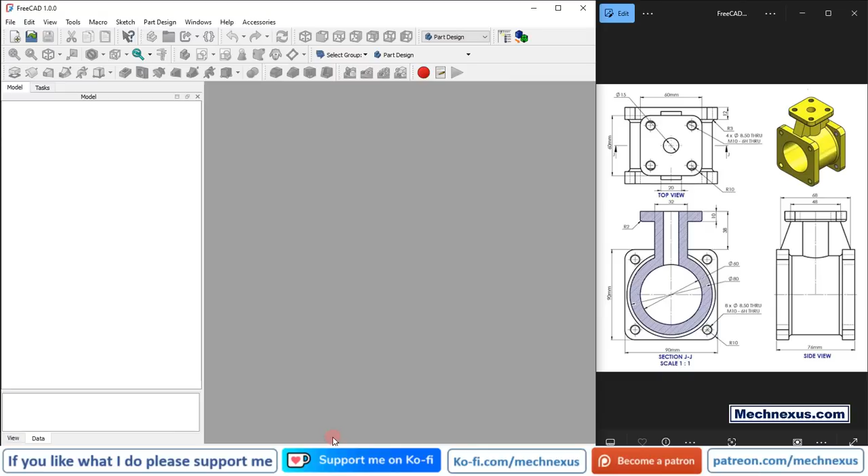So here I have created a new file, and for this tutorial I am using FreeCAD version 1.0. So you must have FreeCAD version 1.0 at least, or a higher version.

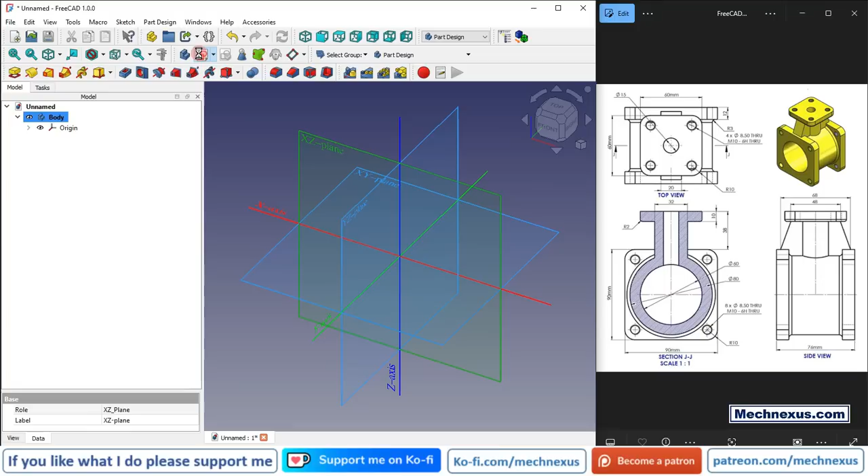Now I will insert my body, and turn on my origin plane. Now we will create our first feature on the front plane. We will select the front plane and click on sketch, and I will turn off this origin plane.

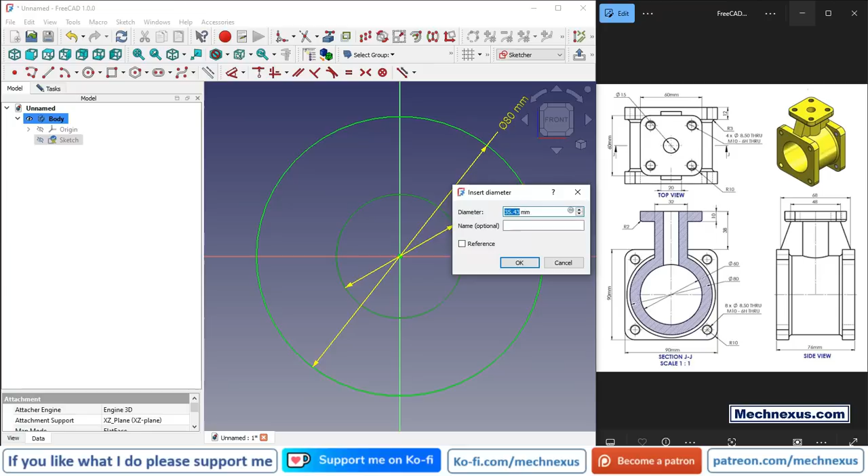Now we will draw this internal and external diameter. So click on the circle and create 2 circles. Click on smart dimension, and the outer diameter is 80 and inner diameter is 60.

Now we will come out of the sketch, and now we will extrude it to a distance of 52. So select the sketch, click on pad, and here tick the symmetric to plane option and give the distance 52 and say OK.

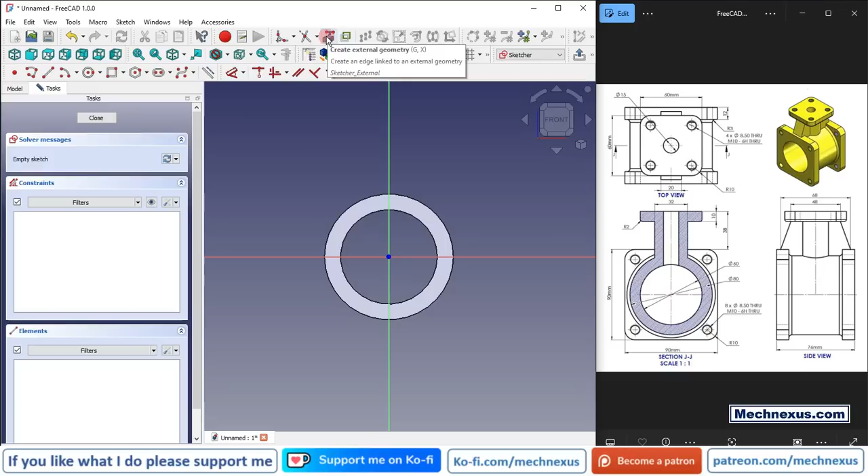Now we will create this pad. So for this we will select this face and click on sketch, and here we will project this internal diameter. Click on project geometry and project this diameter, and now create a circle and press Ctrl key, select both, and here you will see the option of equal constraint.

And now click on the rectangle, create a rectangle, and now here we will make it symmetric. So click on symmetricity, select this point and the origin point, press Ctrl key, select this point and the origin point. So now we will give the dimensions.

So select smart dimension, and it is 90 mm. Now we will press the Ctrl key and select this vertical and horizontal line and make it equal. So now our sketch is fully constrained.

Now we will extrude it to a distance of 12 mm, which you can see here. So here I will select the sketch, click on pad, and here I will give it 12 mm and say OK.

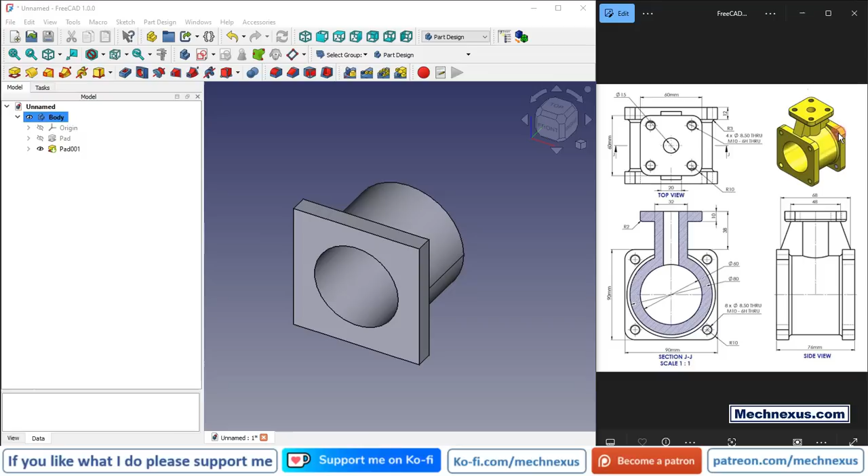Now our next feature is to mirror this pad on the other side. So we will select pad 001 and click on mirror, and we have the mid plane here. So we will go and select reference, and select this mid plane. You can see that it has been successfully mirrored on the other side. Say OK. Now we will move to the next feature.

So our next feature is to create a datum plane. To create a datum plane, we will place our model in the isometric view, and we wanted to create this top feature.

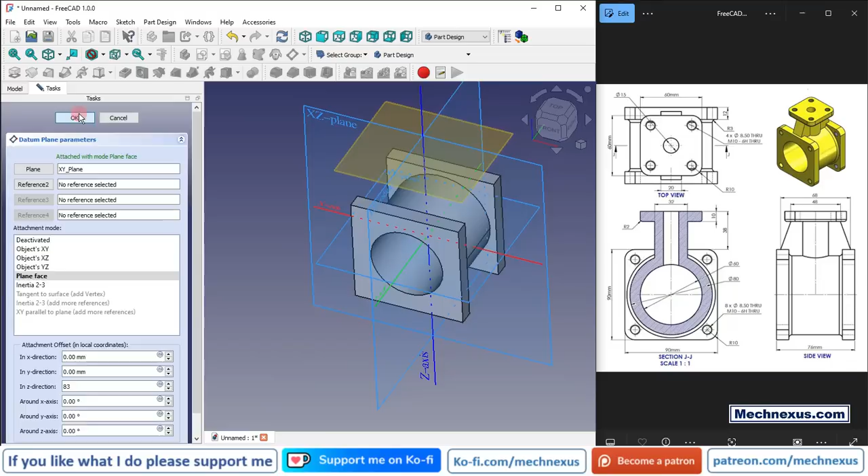So here we will turn on our origin plane, and here we will select this XY plane, and here we will click on the create datum plane option, and here in the Z direction give the dimension 83. You can calculate this dimension from the drawing, I have already calculated it. So you can see that a datum plane has been created.

Now I will turn off the origin plane, and I will refresh my model. Now we will create our next feature on this datum plane, which will be this circular feature.

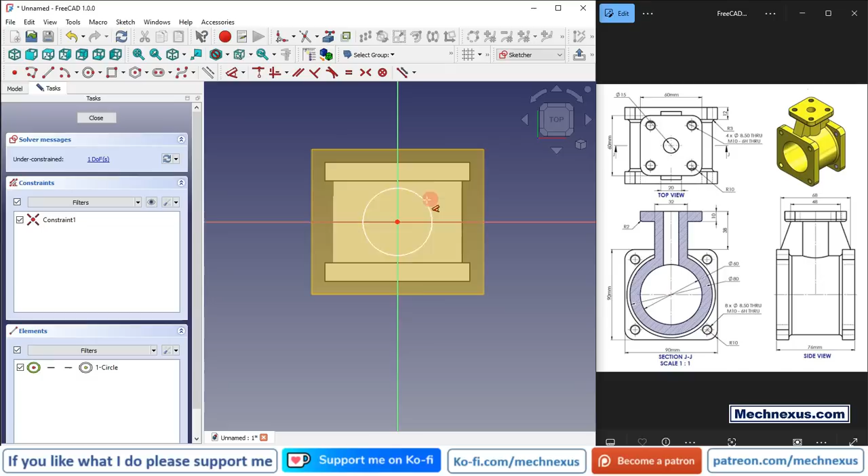So select the datum plane and click on sketch, and here I will click on circle and give the dimension of 32. Click close and press the space bar and hide this datum plane. Now select the sketch and click on pad and click on up to face. So you can see that the feature has been created. Now say OK. Now we have the solid face.

Now we will create this square pad. So select the face and click on sketch, and now click on the 2-point rectangle and create a rectangle, and now click on symmetricity. Select this point and the origin point, and here we can see the dimension is 60 mm. So select smart dimension and give it 60.

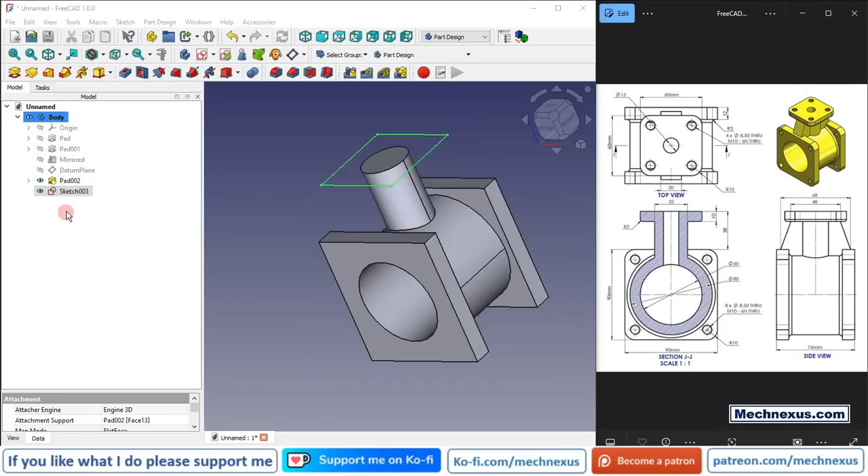Now press the Ctrl key, select this horizontal and vertical line and make them equal. Now come out of the sketch, and we will create a pad of 10 mm. So select the sketch, click on pad, and here we will reverse it and say OK.

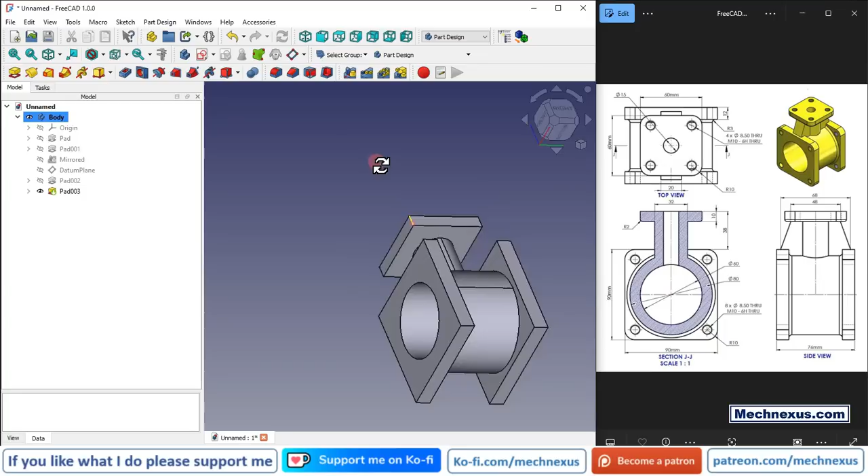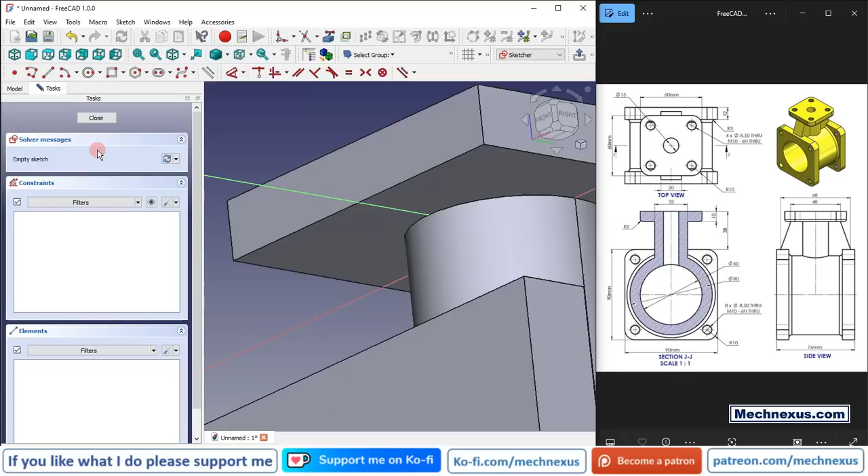Now our next feature is to create this rib. So we will select this bottom face and click on the sketch, and we will switch to the isometric view, rotate our model, and switch to flat lines. And now here we will project this diameter. To do that, click on project geometry and project this diameter, and now let's move to the bottom view, and here for better sketching we will switch to the wireframe.

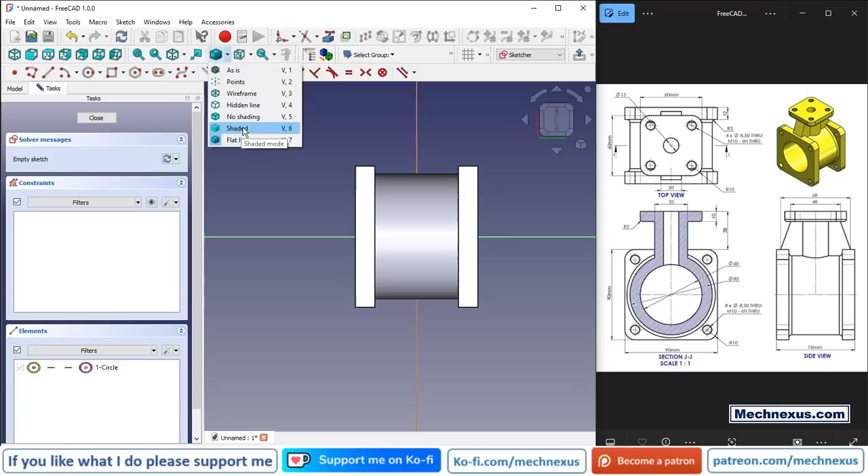So that I can see. Now here I will select a 3-point arc and create one arc, and I will rotate it, and I will select this and this and make it equal, and I will select the center and make it coincident. Now we will select the line tool and close our profile.

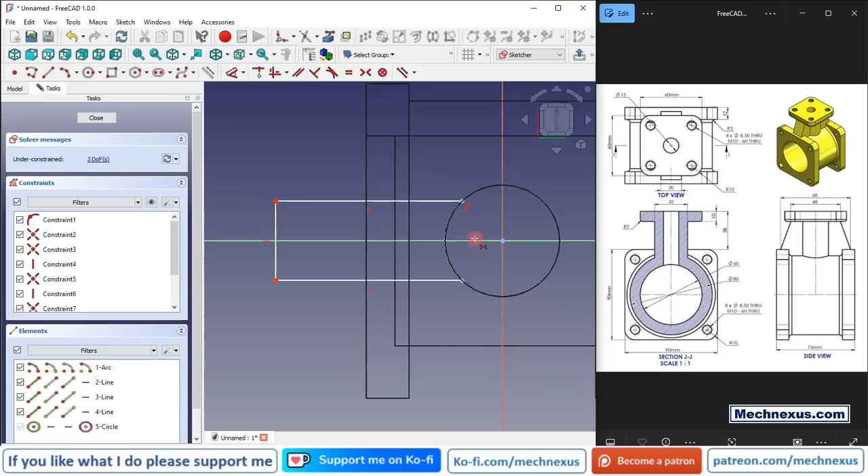Now we will give the dimensions. So we will keep this line outside of the body, but we will make it symmetric. Click on symmetricity, select this point and this axis, and give the dimension 20, and from this line to this origin point give it an approximate dimension of 60 mm.

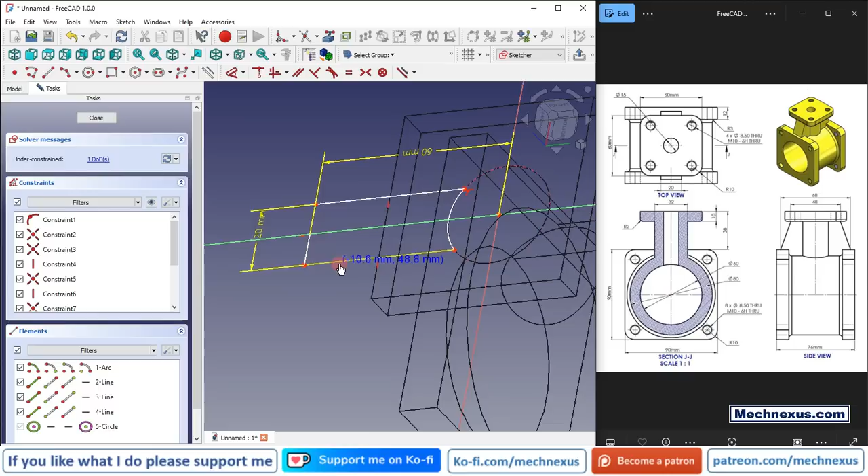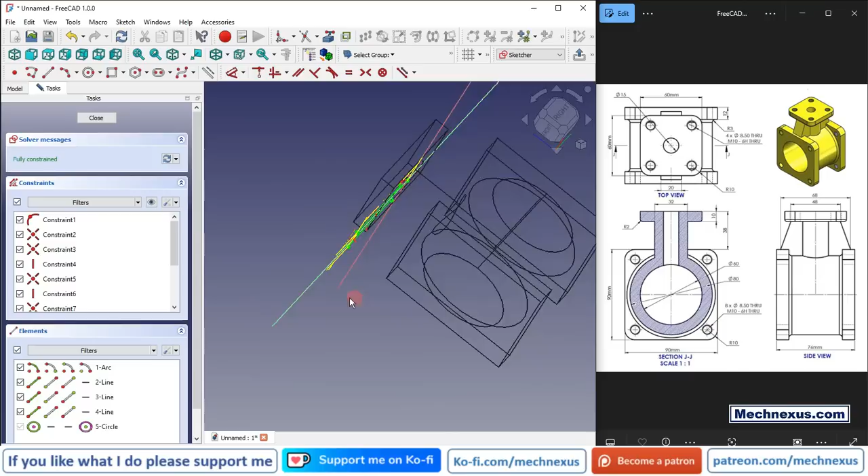Now let's see what is unconstrained. So here symmetricities got removed, so we will again click on symmetricity. Rather than this arc, we will select this point and this axis. So now you can see that our sketch is fully constrained, and now we will come out of the sketch and switch to the flat lines view.

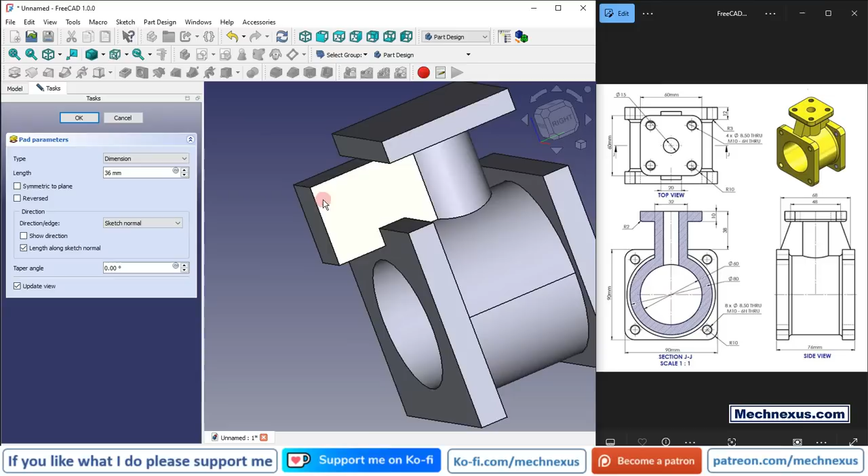And now we will extrude it. So select it and click on extrude. Let's give the approximate dimension of 36 mm. Now we will remove the extra geometry in the next step.

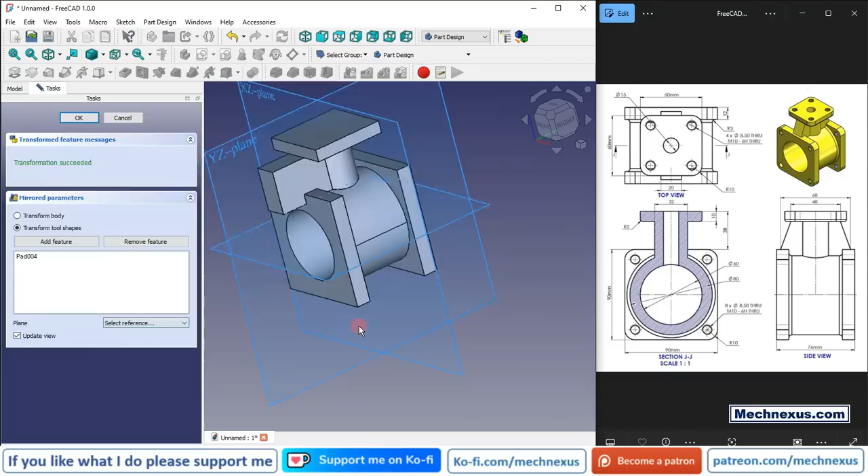So first thing we will do is mirror it on the other side, because we can see the same rib on the other side. So select the pad, click on mirror, and from here click on select reference and select this plane and click OK.

Now we will remove the material. The dimension is given here. So if you see, this is the 48.

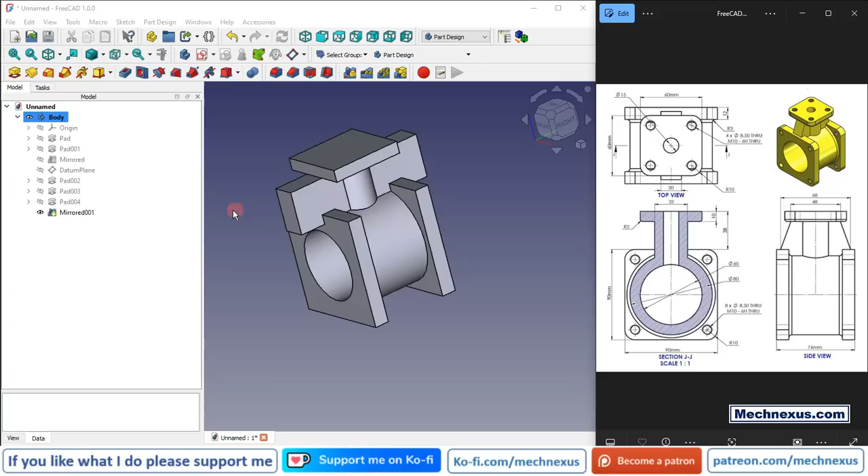So for that we will go on our origin plane and create our sketch on this YZ plane and click on the sketch, and now from here we will switch to the wireframe, go to the model tab and turn off the origin plane, and now we will click on project geometry. We will project it.

And now select the line tool, and here we can see that this edge is also required to be projected. So I will project it, and now I will select a line tool and click on project geometry again.

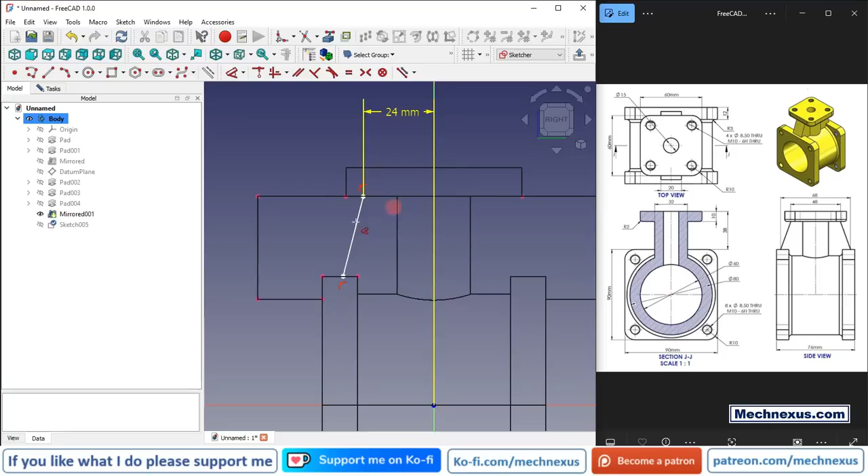It is already projected here, so I will select this point and this line and add a coincidence. So this is the 48, so from center this will be 24. I will select smart dimensions, and from here to here it will be 24, and this point is of a 34. So give it a 34.

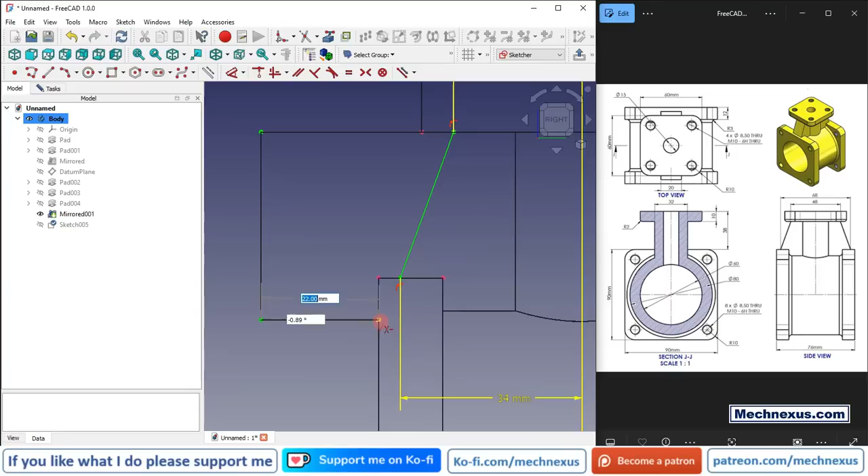Now we will close our profile and completely remove the material. So select the line tool, select this and join it, select this and join this, select this and join. Okay, so we have the closed profile.

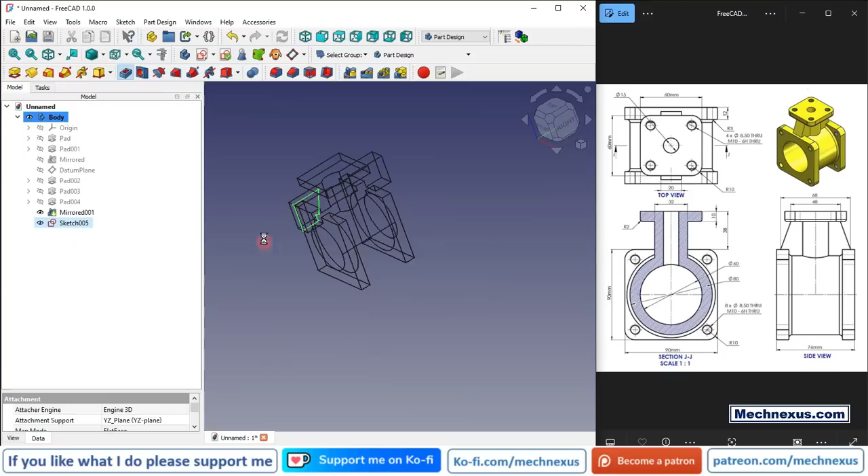Now we will come out of the sketch, and from here we will switch to the flat lines, select the sketch, click on cut, and from here we will say it through all and symmetric to the plane. So the material is removed.

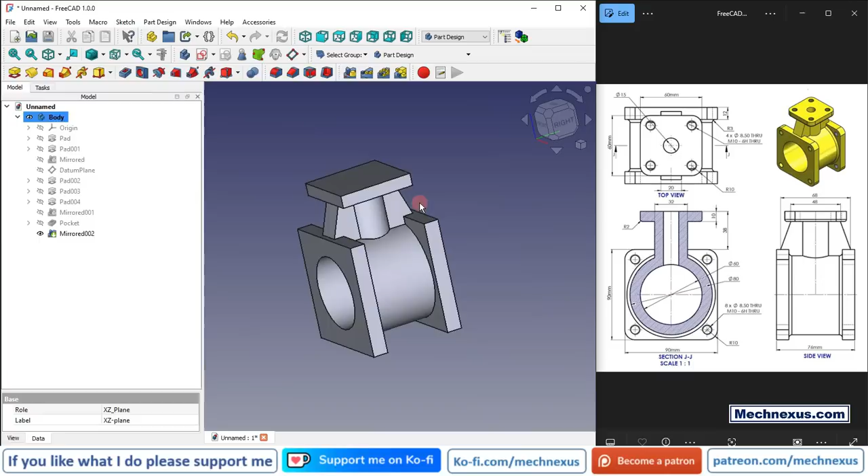Now we will mirror this pocket on the other side. So click on mirror, and from here click on select reference and select the XZ plane and say OK. And now here I have not saved my model, so I will save it.

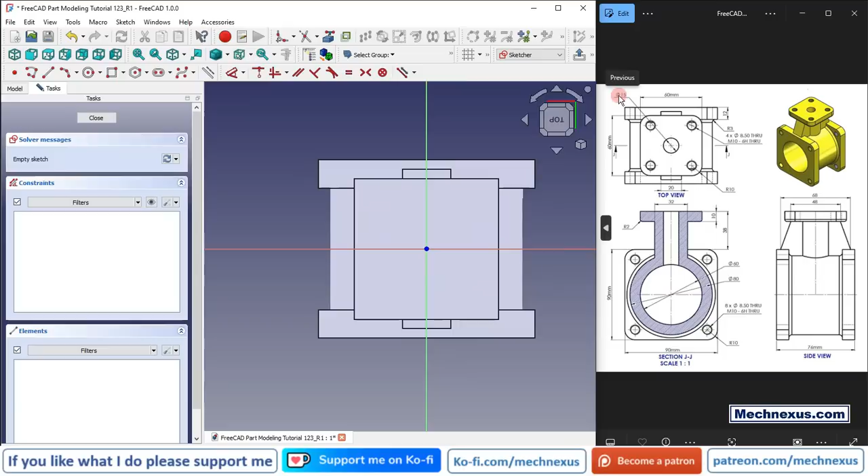Now let's move to the next feature, which is to create this hole. So I will select this top face and click on the sketch, and this is the hole of 15 mm, which we can see here. So click on circle and create a circle, select smart dimension, give it 15 mm, say OK.

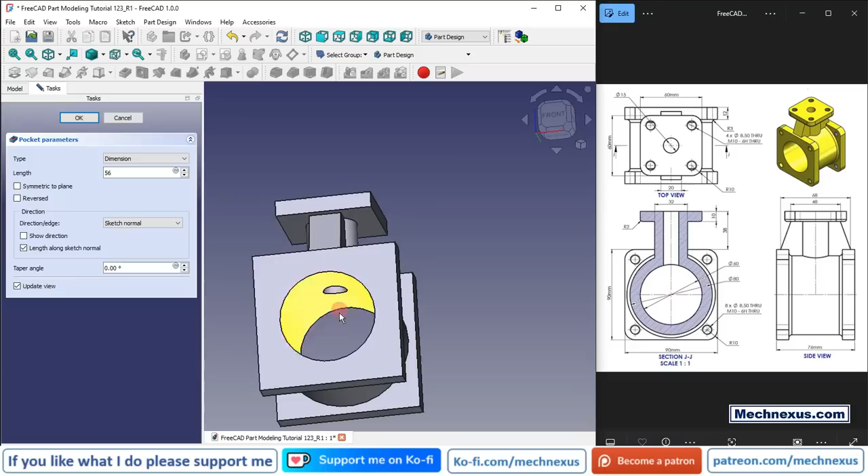And now select the sketch and click on cut. You can also use the hole feature, and now here I will give the approximate distance of 56 mm so that it opens in a clear area here. Say OK.

Now we will create these 4 holes. To do that we will select the face and create the sketch. If you see in the model here in isometric view, this hole is the size of M10. So for that I will select this face and click on sketch, and here I will select a rectangle and create a rectangle.

I will select all the sketch and make it construction, and at the same time I will select this symmetricity, select this point and this axis, and select smart dimensions, and this is the 70, and I will select this horizontal and vertical and make it equal.

Now here I wanted to create an M10 hole, so here I will create 4 circles and select smart dimension, give this 10 mm. Now press Ctrl key and select all the circles and give it equal.

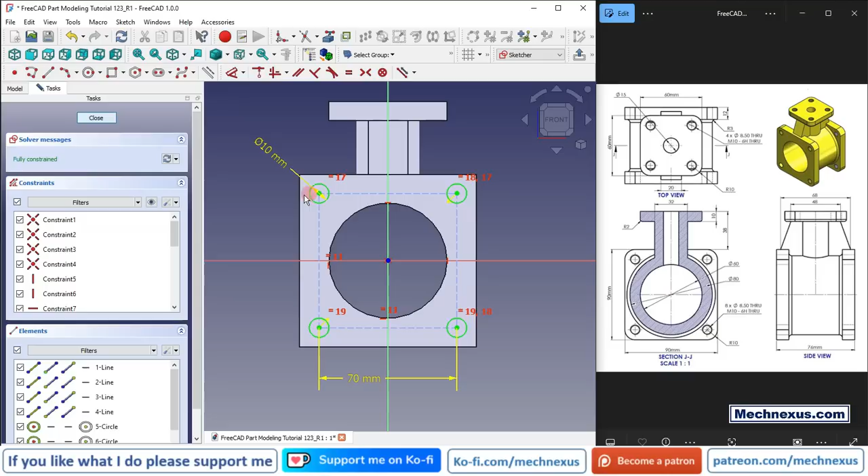Now we will use the hole wizard tool, so select the sketch, click on the hole feature, and from here select ISO metric regular profile, and from here select the size of M10, and I want this M10 hole on this plate as well, so I will make it through all and say OK.

Now in the next step we will create the hole on this top face, which is also the M10 size. So we will select the face and click on sketch, and here we will do the same thing which we did in our previous steps. So we will create a rectangle.

Press the left mouse button and drag it, and everything is selected, make it construction. Now click on the symmetricity, select this and origin point, and now center to center distance is 40.

Some of the dimensions are missing in this drawing, so I have assumed some of the dimensions. So for the dimensions which are missing on the drawing, follow the video.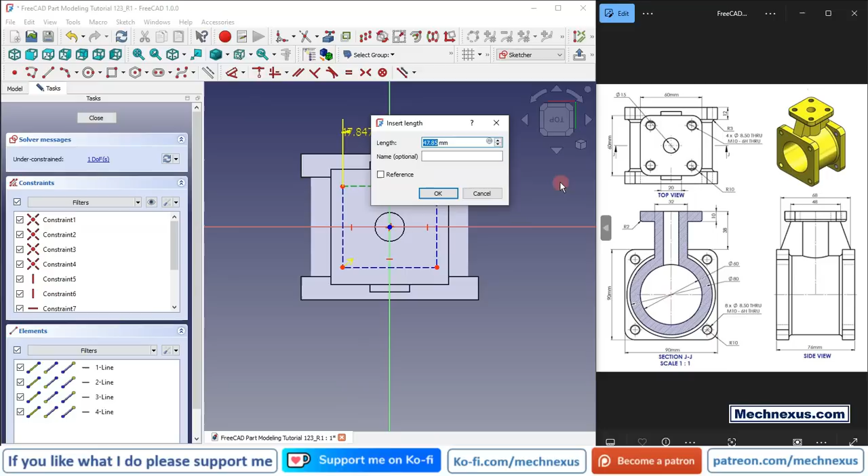So here I will give the 40 mm, and now I will select this and make it equal. Now I will close it.

Here I will again edit the sketch, and I have not given the hole diameter. So as we did in the previous steps, we will create 4 circles, constrain one of the circles and make all 4 equal.

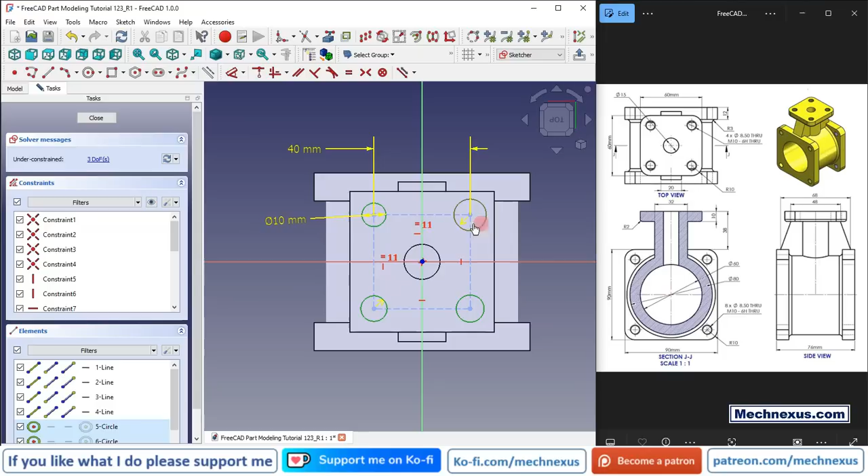So here I will make this 10 mm and press the control key and select all 4 and make it equal. Click on close and click on the hole wizard, and from here ISO metric regular profile and set it to M10, and here I have given the dimension.

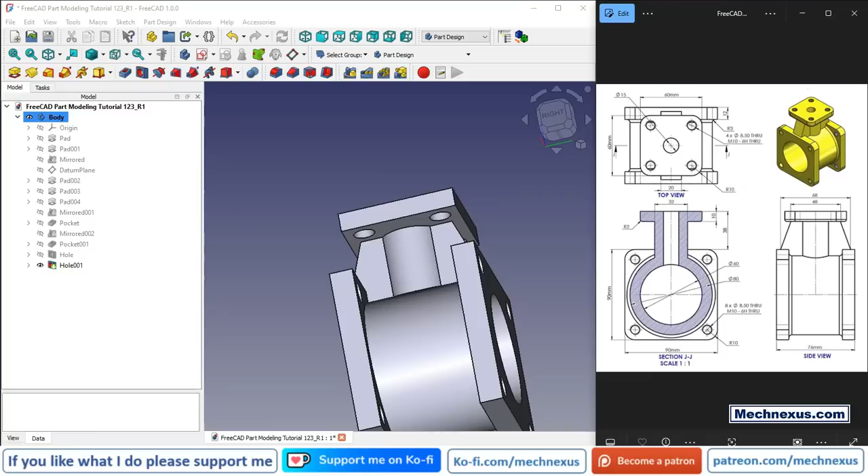25, but my plate thickness is 10 mm, so here I will give it 10 mm. Say OK. Now press 0 for isometric view.

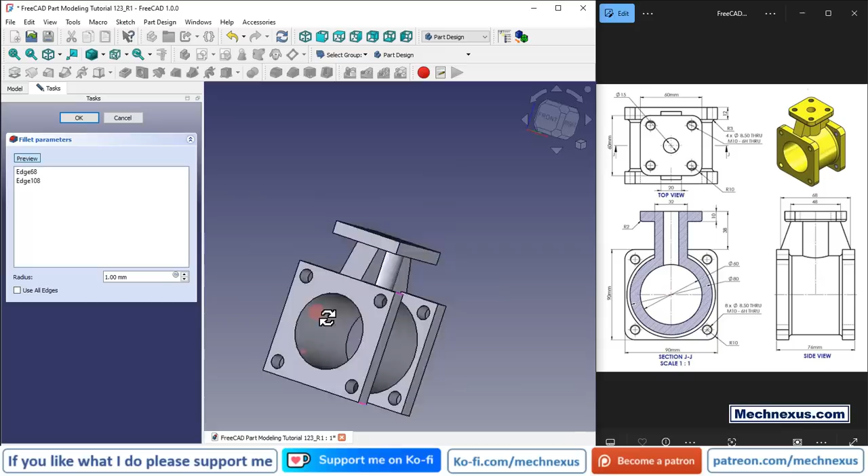Now we will create a fillet. So here is the fillet of 10 mm which we can see here. So we will click on the fillet, and now we will select all the edges which we want to give the fillet of R10.

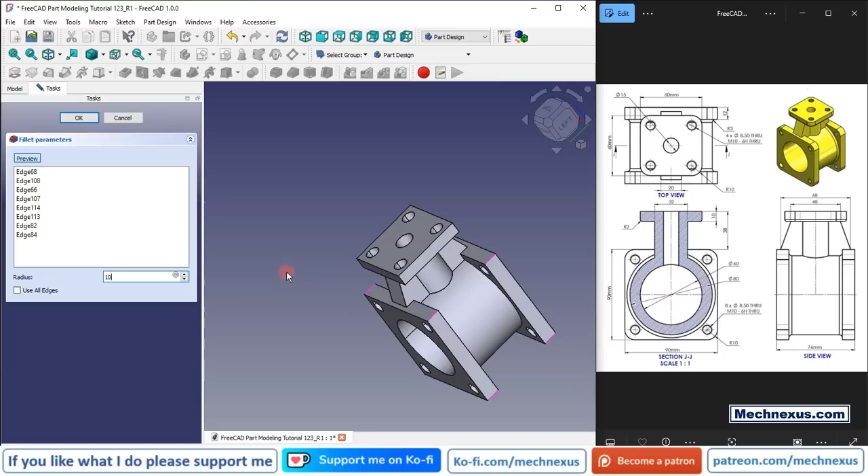I will select this, this, this, and this. So here now I will give the value of 10 mm and say OK.

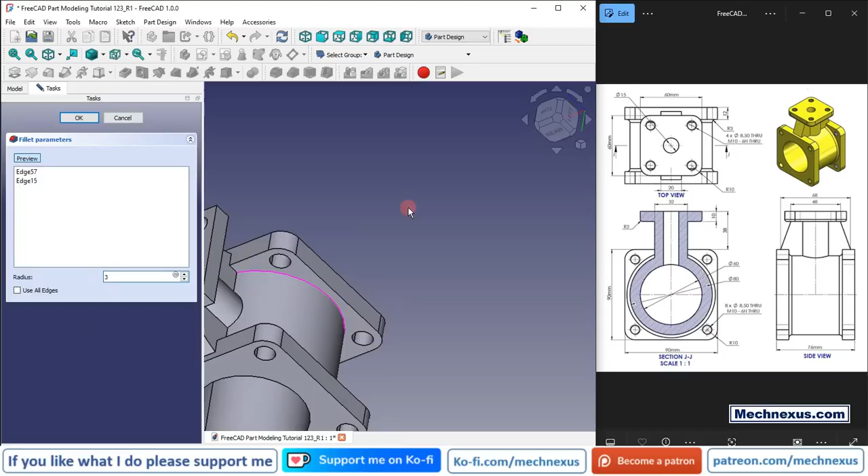So you can see that a fillet has been created, and now we will give the fillet of R3 to this edge here and here, and say OK.

So now you can see that we have successfully modeled this part with respect to the orthographic drawing.

Now we will give the exact color as per our isometric view. So I will right click my last feature, go to appearances, and here in custom appearances I will select this diffuse color and select the yellow.

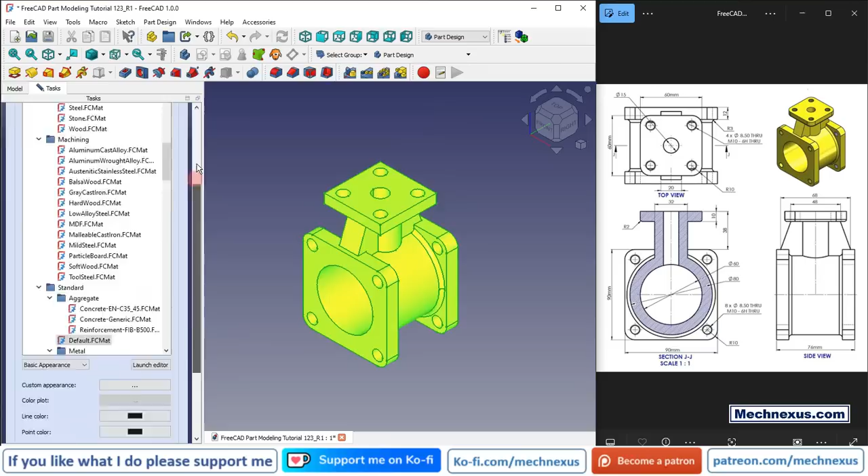Click on close. So you can see that we have successfully modeled this part in FreeCAD. This drawing and this isometric view is made in SolidWorks software, but we can see that FreeCAD is capable of creating the same type of model.

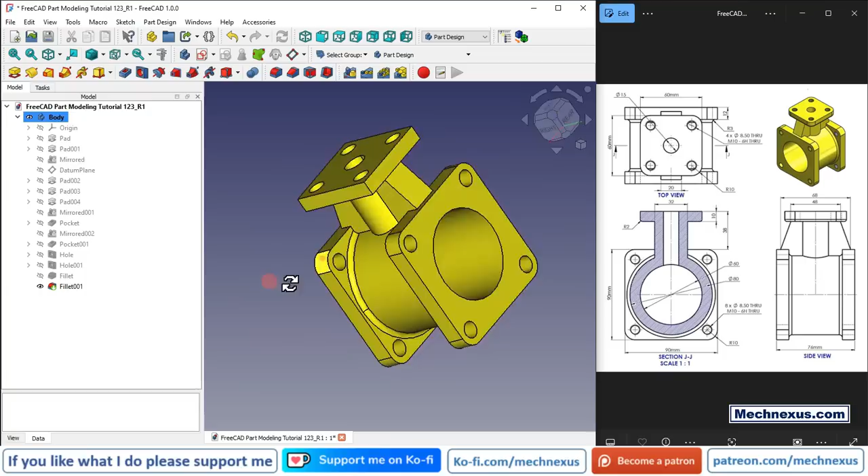I hope you have enjoyed this tutorial. So this is all about this tutorial about the part modeling, and there are some fillets which are missing, which you can provide. For example, this R10 fillet is on the top plate as well.

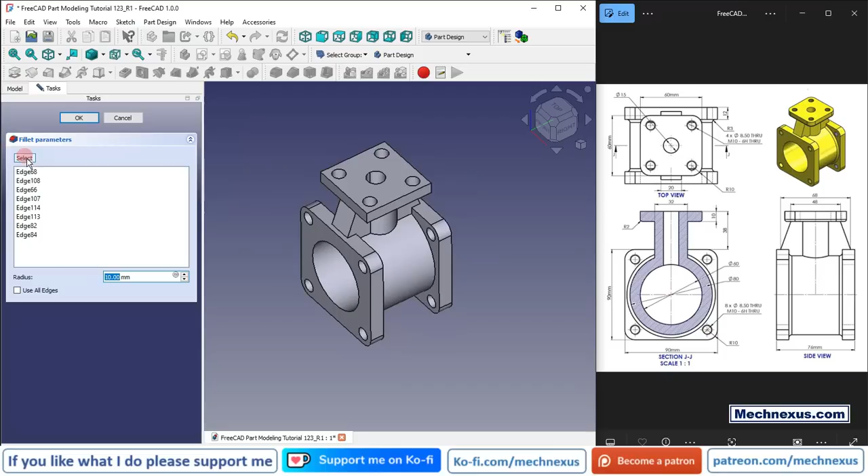So to do that, if you miss any fillet, then we will add the same fillet. Go to edit and click on select, and also select all 4 edges, and say OK.

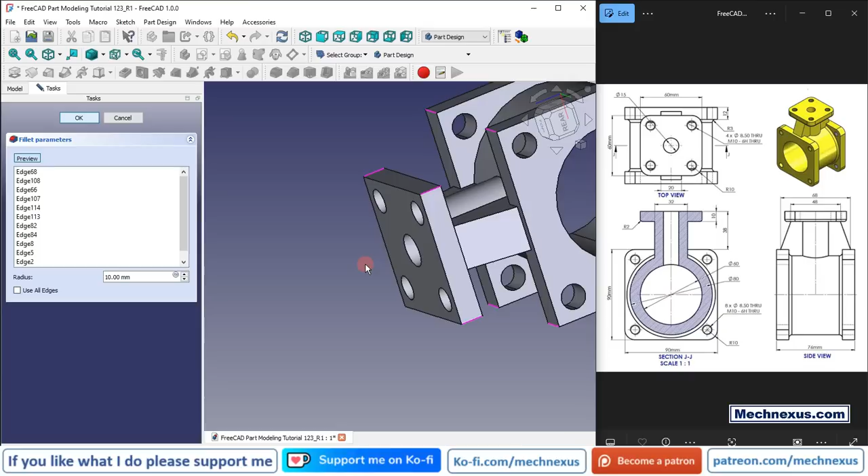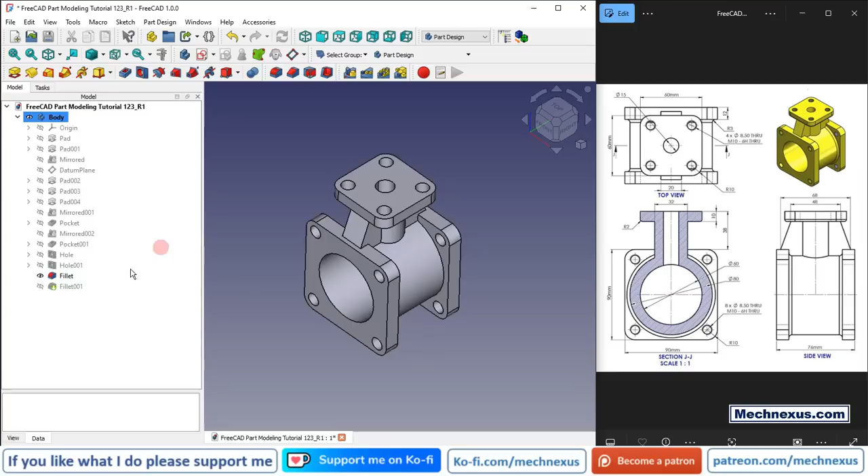Now on the last feature, if you have missed any fillet, then try to give the fillet at once. As we have seen here, we have given all R10 fillet in a single fillet. In fact, you can do it in 2 steps or 3 steps, but my advice is to not increase the tree size, keep your tree size as minimum as possible from your end.